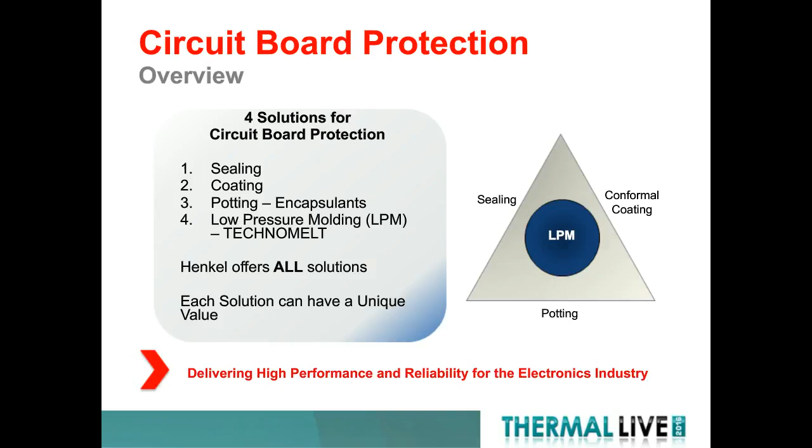Again, Henkel approaches the electronic materials market by providing a value proposition to its customers: protecting electronics from the impact of moisture, high temperature performance, electrical insulation of components and circuits, and design for manufacturing, which is where the Technomelt materials fall into play specifically.

In addition, we like to think of ourselves as developing solutions to meet the challenges of our customers' unique needs, in particular, the thermal management requirements. Many other traditional technologies don't go far enough to support the thermal requirements. Therefore, a secondary material may be needed, applied after the fact, after the electronic component itself is encapsulated or molded.

Looking more closely at the Technomelt solution, it's important to understand what this material really is and how it behaves. Technomelt is a hot melt polyamide material designed for electronic components. It's a thermoplastic material, so it's different than traditional epoxies or acrylic resins where polymerization actually occurs during a cure step.

In this case, the material is processed at relatively low temperatures. It's melted, molded onto the board at relatively low pressures, much lower than what you'd see in plastic injection molding, and once cooled, provides complete encapsulation around sensitive electronics. It's the combination of low temperature and low pressure that make it compatible with electronic components. The benefits include complete watertight encapsulation.

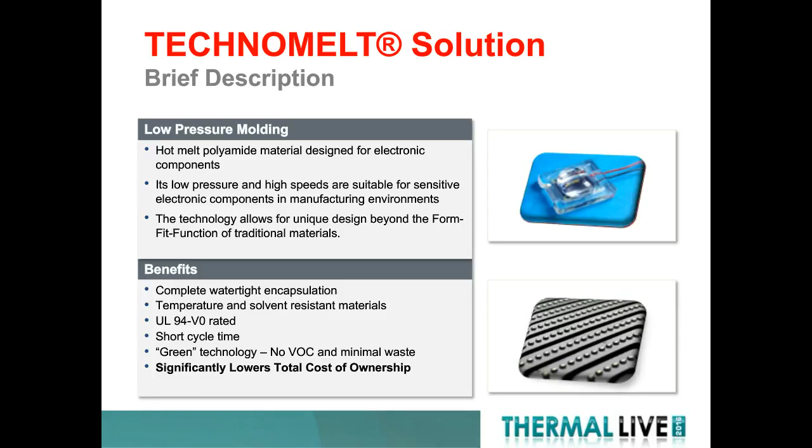We look at this material as an option in our toolbox to help lower the total cost of ownership and use, looking at it from an overall process standpoint. The two images on the right show an optically clear material that molds around components, allowing very high transmittance rates. The black material on the bottom is a matte material that also molds around LED boards to ensure encapsulation for outdoor applications.

A little more detail about the process for low pressure molding in Technomelt solutions. This becomes a simplified manufacturing process. With traditional potting applications, you need a case of some sort. You place the electronics in the case, fill it with the amount of potting material needed, then go to an oven step to cure, let the material settle and cure, and then you're ready to test.

With low pressure molding solutions, you place the electronics in and move to a piece of molding equipment. At low pressures and low temperatures, the material is injected into the mold set, allowed to cool within about a minute or two, and then the part is ready for test. There's no subsequent curing step.

This reduces the number of manufacturing steps, the number of pieces of equipment, and the operations footprint overall—allowing for fewer machines in the manufacturing line and reducing cycle time per part. Since it's a very low viscosity material, it allows for really low injection pressures, so it can be used in collaboration with components soldered onto a board, such as BGA components or traditional SMT mounted components.

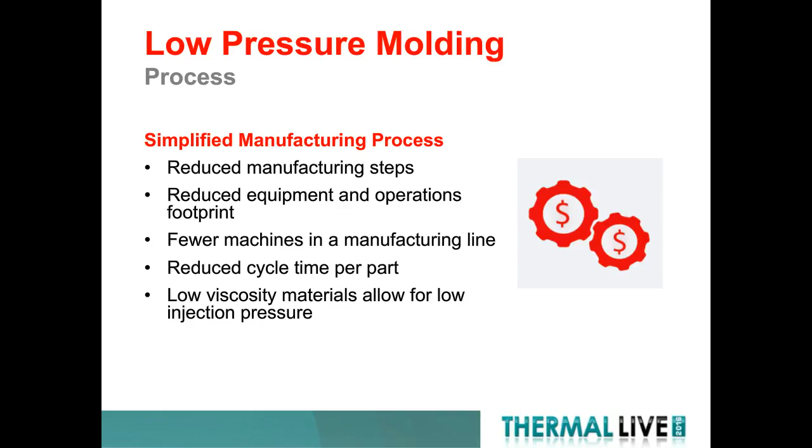Again, you're avoiding that long cure cycle on the back end, and also reducing the overall amount of material used, because a mold set itself is custom designed for the part.

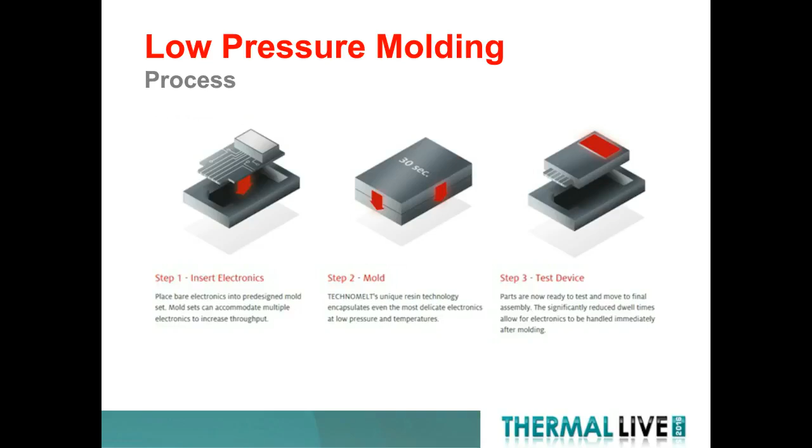The mold tools themselves—if you're familiar with injection plastic molding, you'd probably have used a stainless steel mold set. In this case, they're aluminum, or most often aluminum. They're very easy to mill, drill, and etch, and they provide good release of the molded parts, so you don't have the same issues you'd have with plastic injection molding.

Steel inserts are recommended in contact areas with harder metal parts to prolong the life of these mold sets. But they do offer very long life, and since the Technomelt material is non-abrasive as a resin and non-corrosive, these mold sets last significantly longer than what you may be used to.

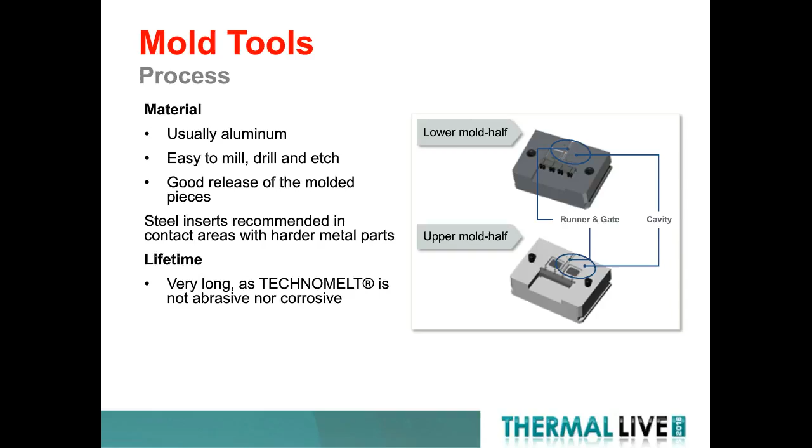I mentioned before the process conditions utilized in low-pressure molding applications. If you think about traditional plastic injection molding, or even molding with traditional potting materials, the injection pressure itself is relatively high, and the temperature is rather high, sometimes above the liquidus of the solder joints with which components are laid down. In the case of low-pressure molding, the pressure and temperature are relatively lower than injection plastic molding, making it suitable for sensitive electronic components.

Also, the process time is significantly shorter, so the actual temperature that a solder joint, for instance, would see is only observed for a very short period of time, meaning there's very marginal impact to anything related to solder joint reliability.

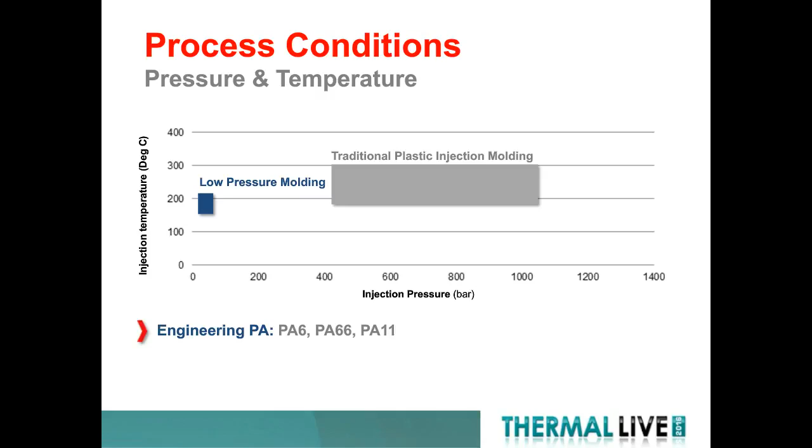The products themselves have been optimized to meet the needs of the electronics industry. They're lightweight materials, so the density of unfilled materials is less than 1. They have excellent adhesion to multiple surfaces. They are designed to be watertight encapsulation after molding. They provide high temperature, shock, and environmental resistance, as well as solvent resistance. There's no cure, as this is a true thermoplastic material, so there are no byproducts given off. It's a very compliant material, suitable for sensitive electronic components, which we get questions on quite often, given that it is a thermoplastic and people are very familiar with plastic materials.

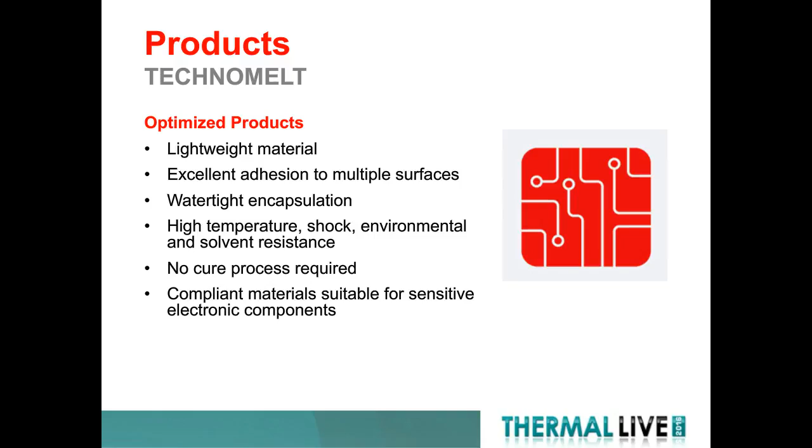Quick general glimpse of the material properties. The materials are temperature resistant, with short-term exposure up to about 185 degrees C. The portfolio is tailored to offer solutions across the gamut, but typically we see the maximum temperature exposure at short terms to be 185.

They're very flexible materials. Their elongation at rupture can be up to 800%, so very similar to the plastics you are familiar with. From a cold temperature flexibility standpoint, meaning how well it does at cold temperatures, we can go all the way down to -50 in terms of a mandrel bend or 180-degree bend before cracking.

The materials have good chemical resistance related to automotive fluids for short-term exposure, and generally good chemical resistance related to non-polar liquids like oil, which can be done in long-term harsh environments. It is a plastic, so it does absorb moisture, 0.2 to 2%, 24 hours at 22 degrees C. However, it reaches a saturation point where no more moisture would absorb into the material, and the migration into the electronics is null. There are also flame retardant properties - many of the materials are UL listed at 94V0, and some are even RTI certified.

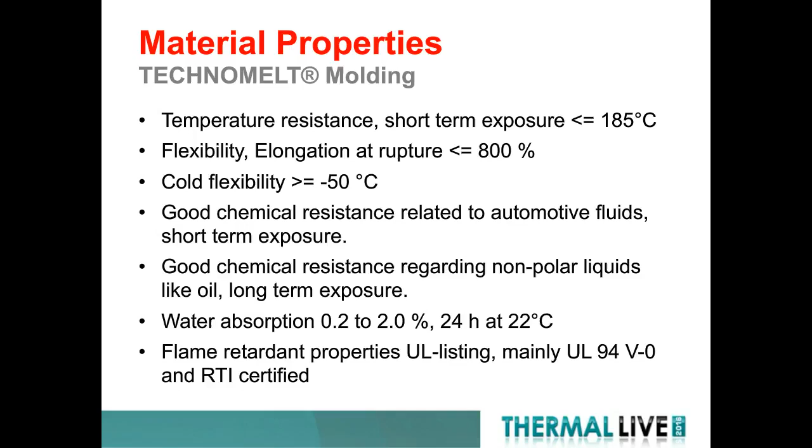Many of the resins we've selected are tailored specifically for different applications, so they provide a different set of properties. However, in the scheme of things, they're all simply resins. The chain lengths may be different, but they are unfilled polyamide thermoplastic resins, providing minimal functional benefit other than the sealing or encapsulating capabilities.

But using these materials, you can leverage something related to the design itself of your application. No longer are you bound by the traditional potting application. You can now use the mold set to combine these materials into the electronics market, allowing for improved design flexibility with precise design, allowing for more space and flexibility within the final assembled product, and design capabilities beyond the fit, form, and function of traditional materials.

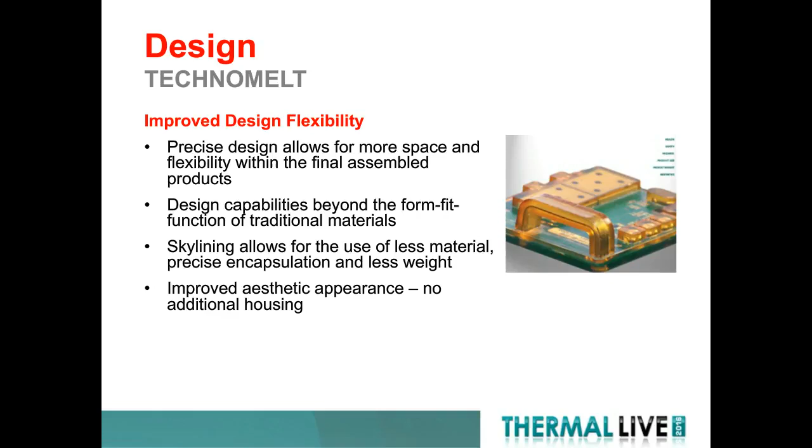The Technomelt materials are quite good in other areas as well, such as sustainability considerations. Waste is minimized through the process, and since it's a thermoplastic with no reaction, any runners or similar material can conceivably be reused. They are natural ingredients with no harmful fumes from the molding process. If you've ever been in an injection plastic molding house, or even curing an acrylic material, there's an odor given off during those processes.

With this material, the odor is non-hazardous, if there is any odor, and since the materials are derived from natural raw materials, they continue to be very sustainable and eco-friendly. All are RoHS and REACH compliant. The materials obviously have a long shelf life, considering they can stay at room temperature for prolonged periods of time, and are very flexible in terms of how you intend to use them.

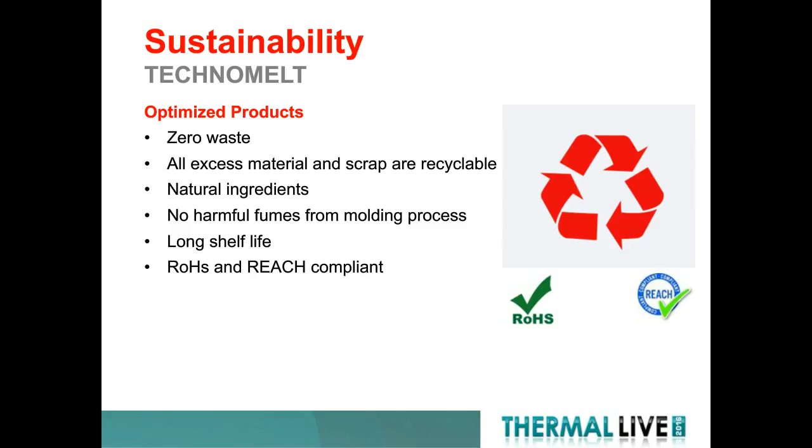We look quite often at total cost of ownership. In other words, not just recommending a particular material itself, but trying to recommend the right material for the right application to meet the overall requirements of the application.

From a cost-saving standpoint, we like to highlight that these materials allow for fewer physical parts, reducing the number of items on the bill of materials, and reduce shipping costs of final products, given that the materials can be used in less weight, so the configurations could be a thinner form factor. Overall, reduced total cost of ownership, and increased throughput given that the materials don't require subsequent cure steps, with relatively lower capital equipment costs versus some of the traditional molding or potting equipment.

Your inventory and work in process is also reduced. And finally, lower labor costs, as these pieces of equipment and the molding process itself require very little oversight and very little operator input.

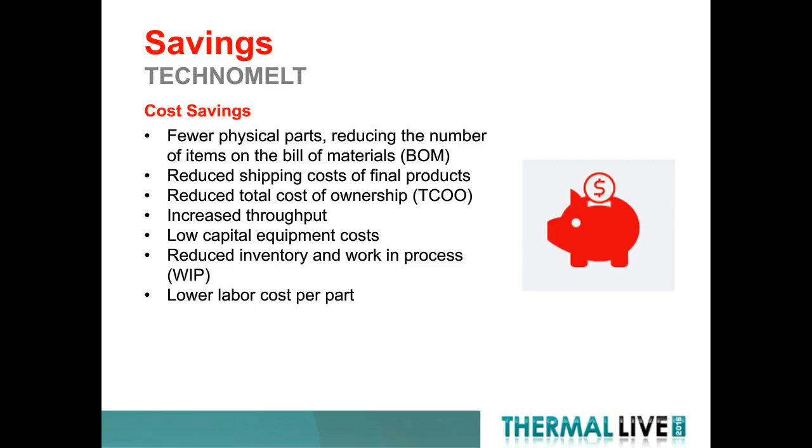When you compare the traditional potting process flow itself to the low-pressure molding process, you see the number of steps are significantly reduced, and by that, the overall time per part is reduced as well.

With the traditional potting process, you have a plastic housing of some sort that may need to be molded in a separate step. As parts need to be assembled and placed into a configuration to go into that housing, you insert those electronics, possibly preheat the parts to allow the potting material to flow well and reduce voids and bubbles, dispense the potting material, allow for a settle time or possibly do so under vacuum, and then move into either an oven cure or a prolonged room temperature cure, and finally your parts are ready for test.

Whereas with the low-pressure molding process using these materials, you insert the parts, overmold with the low-pressure molding Technomelt material, and then the parts are ready for test in a matter of minutes.

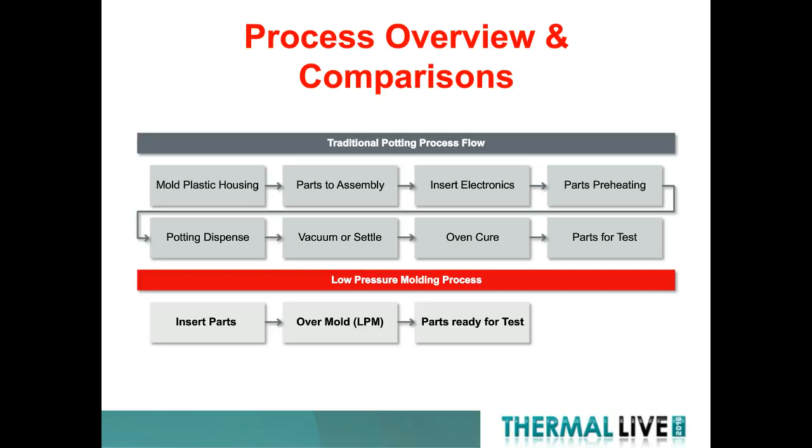The three main elements we look at are the process itself, the materials, and the equipment, to compare with traditional processes and try to leverage this material's capabilities to offer a lower total cost of ownership.

For process-wise, there's less manpower required per line. On the material side, reduced material consumption per part. On the equipment side, fewer pieces in a smaller footprint.

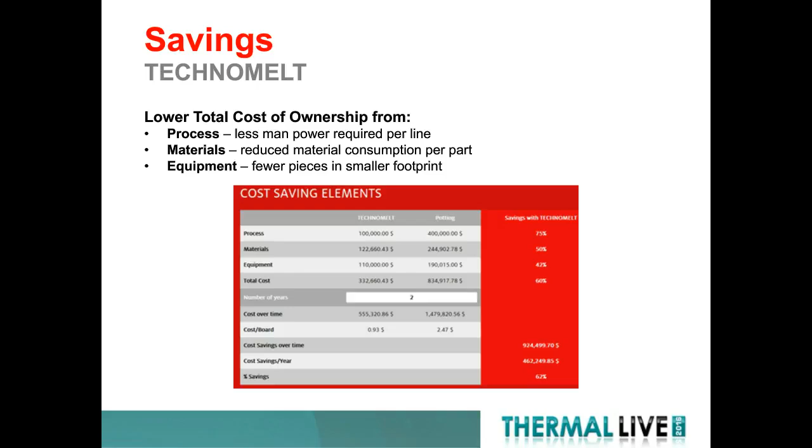Now that we've laid the groundwork for what the Technomelt portfolio looks like and how these materials function, I wanted to talk more specifically about the thermally conductive solution that we've promoted today.

This is really a first-of-its-kind type of material, adding a filler into an electronics-compatible, injectable hot melt polyamide resin. This is a traditional thermoplastic hot melt adhesive, designed for encapsulating these sensitive electronics. We functionalized the performance of the material to provide a bulk conductivity over half a watt-meter K.

These materials, as a resin themselves, are typically 0.2 to 0.3 watts-meter K, meaning they're effectively insulating—there's no heat transfer through the encapsulant itself. The novel filler package we've developed allows for processing on standard low-pressure molding equipment. In other words, it doesn't require a significant change to how the materials are applied today.

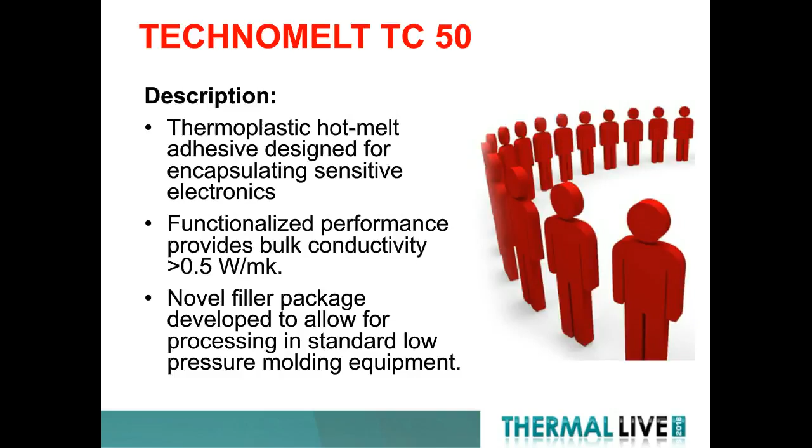The project goal we endeavored toward was to develop a higher thermally conductive material. As I mentioned before, with 0.2 watts-meter K, you really don't transfer much heat. The thermally conductive Technomelt allows heat transfer through that molded encapsulating layer.

Our first generation material is over half a watt-meter K—it's actually measuring at about 0.6, 0.7. Our goal is to develop a material roadmap with materials up to 1.5 watt-meter K for more power electronics-centric type applications.

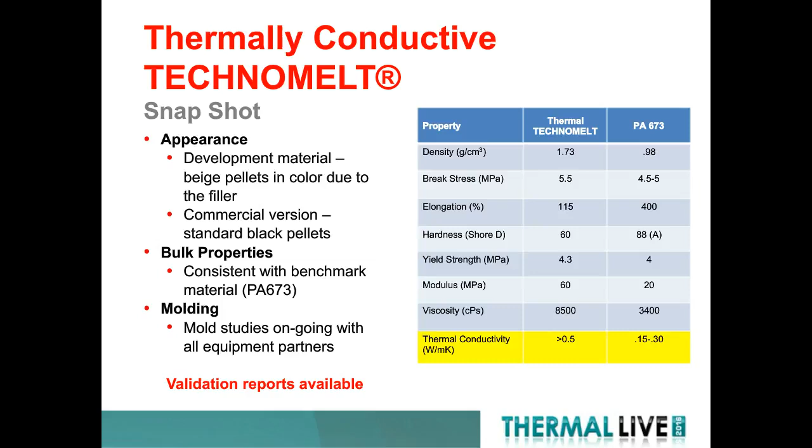Highlighting the performance of this material again, the TC50, or the thermally conductive Technomelt, allows for sealing of electronic components using the low-pressure molding technology. Thermal conductivity is greater than half watt, enables the heat dissipation through the encapsulating layer. We've done significant thermal modeling and in-package testing, which shows significant reduction of component operating temperatures. We'll go into that in the next couple of slides.

From a product standpoint, a technology standpoint, again, I talked about viscosity, hardness, elongation, and break strength previously. What we see is an operating temperature range from minus 40 to about 150 degrees C. This material is going into RTI certification now. With that thermal conductivity, we expect good things for both those ratings to come out. In the two images below, you see a LED driver board being molded, or a mock-up of it being molded, and then placed into its frame.

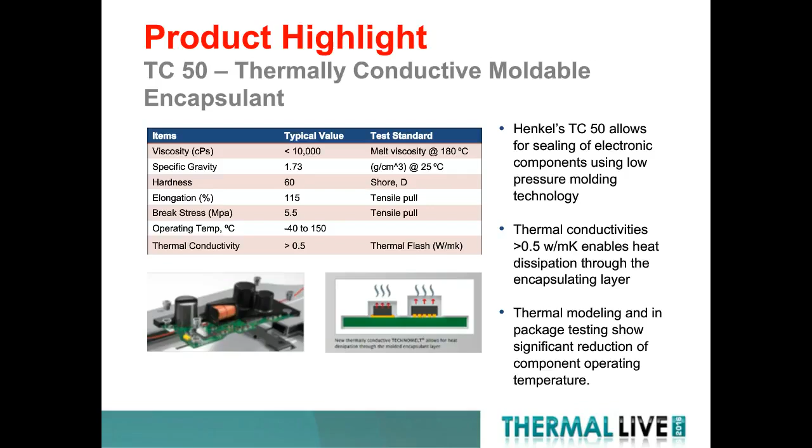This is a thermal model developed internally here at Henkel, where we looked at unfilled material at 0.2 to 0.25 watt-meter K versus filled material at 0.5 watt-meter K. What we did is try to develop a part that we could use to test the actual difference between these two materials in terms of functional performance and measure its actual benefit for an application itself.

So in the top of that depiction on the right, what you see is a power device mounted on a board and then molded with the Technomelt material. It's placed against a heat sink to direct the heat from that power device out into the material itself, and we've measured the performance or the temperature in this model in both situations.

What we saw is about a 40 C reduction in the observed operating temperature between these two situations. So again, this power device is at the same power rating with the same current going through it and power dissipation. However, the material itself in the bottom picture is allowing for a more uniform distribution of the heat outside of the layer, or through the encapsulating layer away from the board.

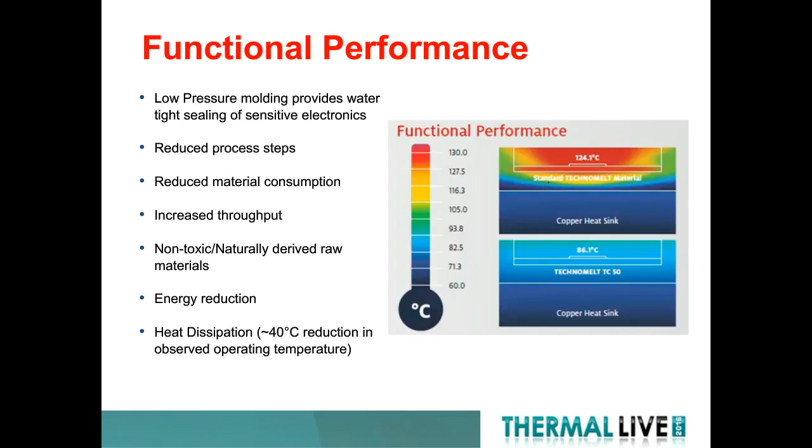How does this work, or how does this look in a more realistic setting? We took this IGBT, which you can see in the image on the right, and mounted that to a circuit board. After mounting to a circuit board, we then molded these parts. So we put them in a low-pressure molding tool in a mold set, injected the standard Technomelt around or into that tool set, and encapsulated the part, leaving just the pins themselves exposed.

Those pins were then placed into a jig that was then powered up, used to power up the device itself, and we were able to monitor the heat curve, or the cooling curve in this case, for that particular component. So the test setup used a sense current of 200 milliamps, heating current 36 amps, 20 seconds of heating, so we turned the heat on for 20 seconds, and then monitored for 2,000 seconds on the cooling curve.

The analysis itself, or comparison, is performed off the cooling curve when the power reached 42 to 45 watts, so pretty high power for these devices themselves. What you see in the difference in these two curves is, one, the standard curve on the top, and two, the curve with the part molded with TC50, or the thermally conductive encapsulant, on the bottom. Again, this is a molded IGBT, so something that would have mold compound already around the device itself, mounted onto a PCB, a green circuit board, and then molded over the top using the Technomelt materials.

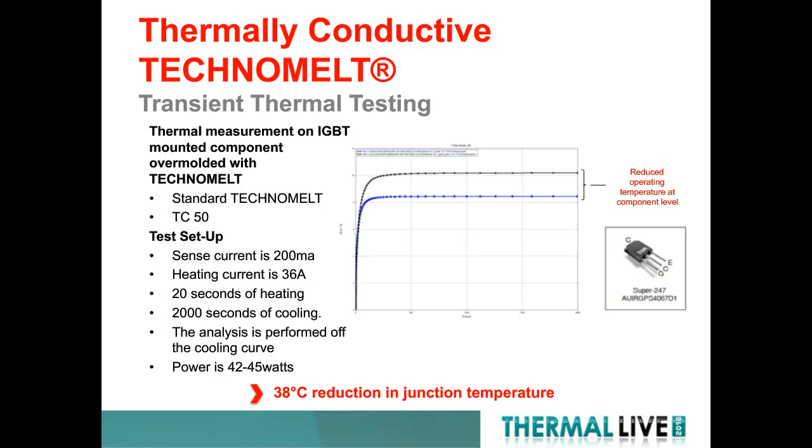We grabbed some images with an IR camera as well. These images were taken at the same point: 15 seconds of heating at 45 watts and 35 seconds of cooling. So after they heated up, we let them cool, and 35 seconds later captured an image.

The crosshairs show the actual temperature in the upper left: 61.9 degrees C for the thermally conductive material, and 86.6 degrees C for this PA 678, a traditional material with 0.2 watts meter K.

What you're seeing is the heat dissipating more uniformly through the encapsulating layer, and at the exact point where we're measuring, the heat itself is not reaching the same level as with an insulating material, which is what you would expect to see. It's just a visual representation to reinforce the data from the previous slide.

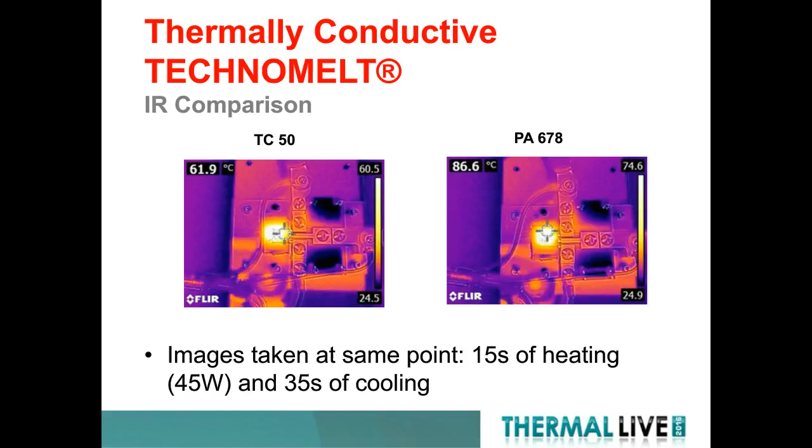In this particular case, we've started to see interest from many different industries and applications. This particular one is a temperature sensor for an engine compartment. The function here: heat is transferred from the connector through the molded material to the sensor inside.

Traditionally, they would use a non-filled resin to mold these, and they'd get a certain level of performance. Using the thermally conductive material, their sensing performance is significantly improved. The test this material goes through after molding includes high temperature storage, humidity testing, and vibration testing. The thermal conductivity allows for faster response time versus traditional materials, improving performance, which is driving interest in this material for this particular application.

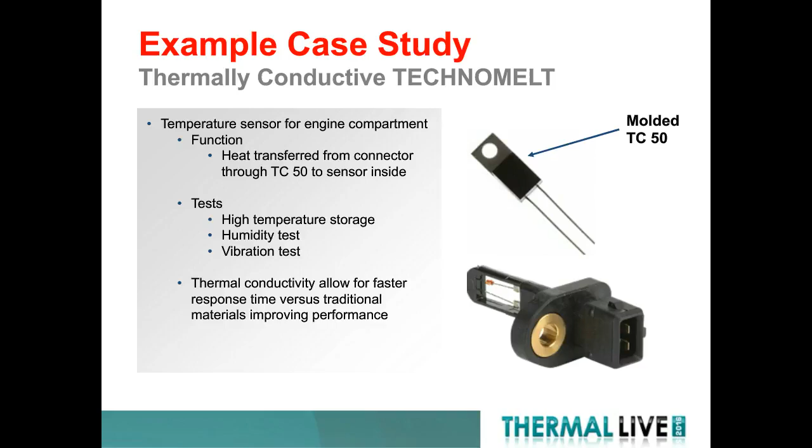We have a variety of target markets and applications that we find interesting for this material, both in LED electronics, for instance driver boards, control units, and ballast and fixturing; on the solar side, for micro-inverters, power management electronics, and smart connectors; and in automotive electronics, power steering modules, inverter modules, battery cooling, and power management. Many of these are under investigation right now.

We supply materials to quite a few applications in these areas in more of the traditional sense, from potting, conformal coatings, and sealing materials. And now we're introducing this as an option for those particular markets and applications to look at.

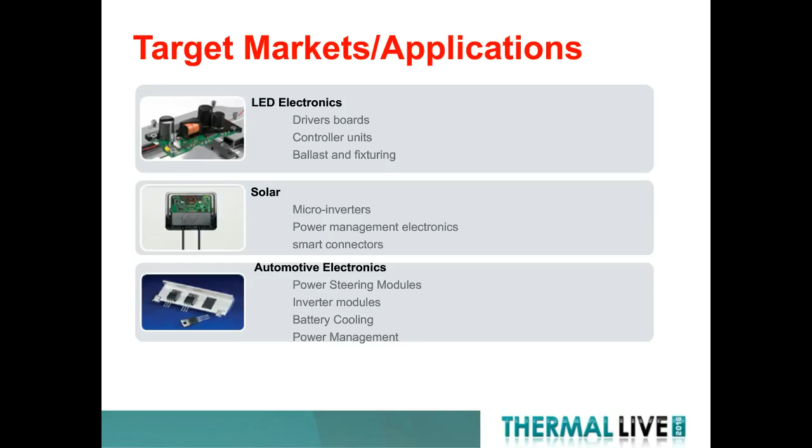One quick note about the material - I get this question often: how is it packaged? The image you see is actually from one of our manufacturing sites. The material comes out as small pellets, small plastic pellets if you will. They're hot melt, thermoplastic, polyamide resins in pellet form, typically packaged in a 1 gallon or 3 gallon can or pail, with additional options available for much larger volume.

The product name itself is Technomelt TC50. The tech data sheet is included here, and we have a contact name for our technical resource in the Americas. We also have technical engineering staff globally to support questions on these particular applications.

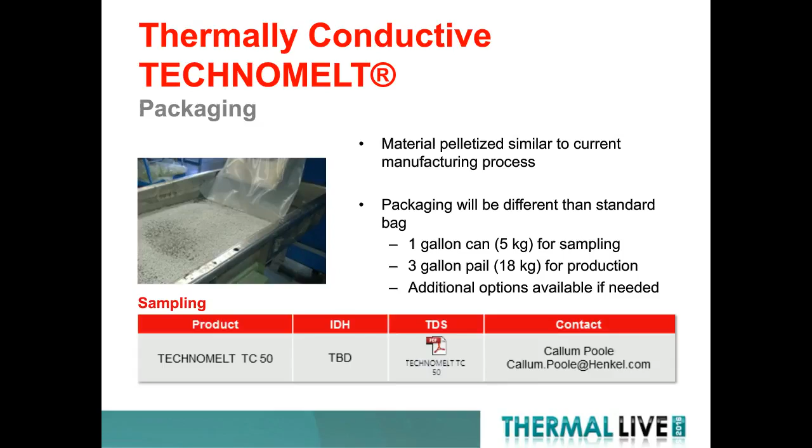I mentioned earlier that we have a development roadmap that we continue to pursue, with the TC50 being the first material introduced here to meet the functional requirements of a material greater than half a watt meter K in the molding and encapsulating line. We're targeting a 1.5 watt meter K material as well, and also continuing to look at blending features, where some of our resins are UV stabilized or high temperature stabilized. We would introduce this thermal performance benefit to those as well.

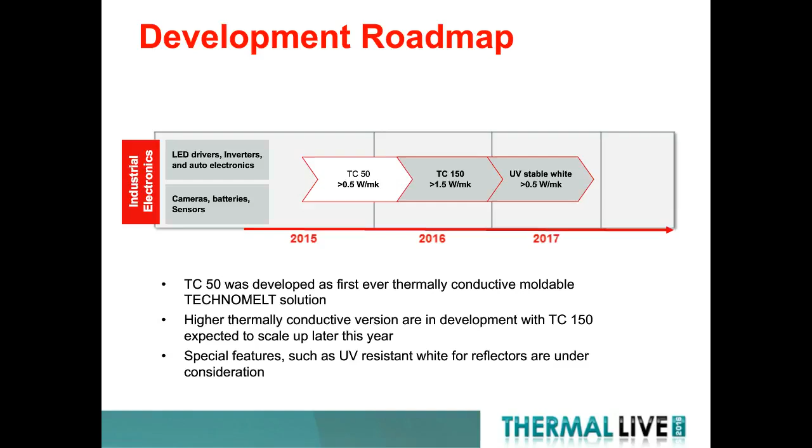That brings us to the end of the presentation. I wanted to sum up and conclude, reinforcing the fact that Henkel's low-pressure molding process using the Technomelt materials meets the demands of the challenging electronics market.

Again, these materials are low-pressure moldable, at low temperature and relatively low pressure versus injection plastic molding. The materials have now been functionalized to include thermally conductive offerings, which allow heat dissipation through the encapsulating layer, expanding the use of these materials to new application spaces. Through thermal modeling, we've seen reduction of component operating temperature for materials with thermal conductivities over half a watt meter K. Finally, Henkel continues to develop new technology to leverage this solution by adding these functional benefits.

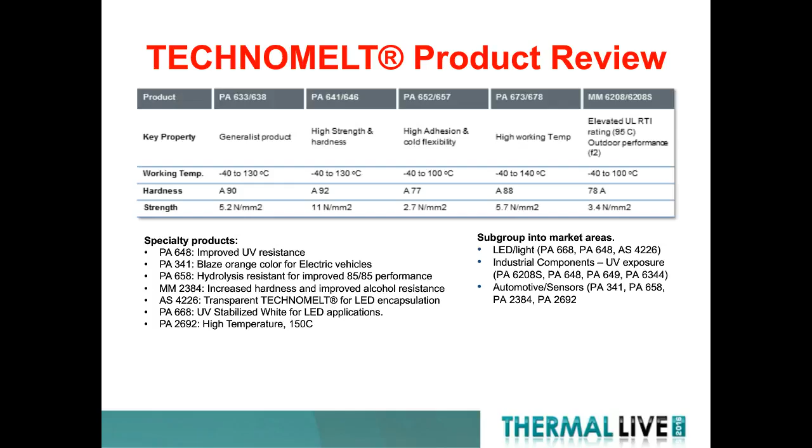This material has actually been used in 3D printing applications with various consortiums in Europe, for instance. We've looked at the thermally conductive material to see if it would work with 3D printing technology, and we're still investigating that at present. We've also had some other concepts for functional materials that seem interesting to the 3D printing market, especially for creating 3D printed circuits themselves. So it's undefined at this point, but it's an area of interest for Henkel as a corporation.

We're almost at the end of the presentation and Q&A. Let me pose a question as a closing thought. How do you see this being implemented in a manufacturing line? Imagine if it's an SMT line with circuit board assemblies—how does this fit into a flow in a manufacturing scenario?

Very similar to how you would see a potting or other traditional encapsulation process set up in a line. Parts typically go through an SMT process, components are mounted on the board, and possibly go through a functional test to make sure solder application had no issues with BGAs, for instance. Once components are marked ready for final assembly, they typically go to the encapsulation side of things. In this case they'd go to a low-pressure molding line, where parts are inserted, molded, and then taken out the other side for any final connection, assembly, or test needed. So it's a very inline type of process.